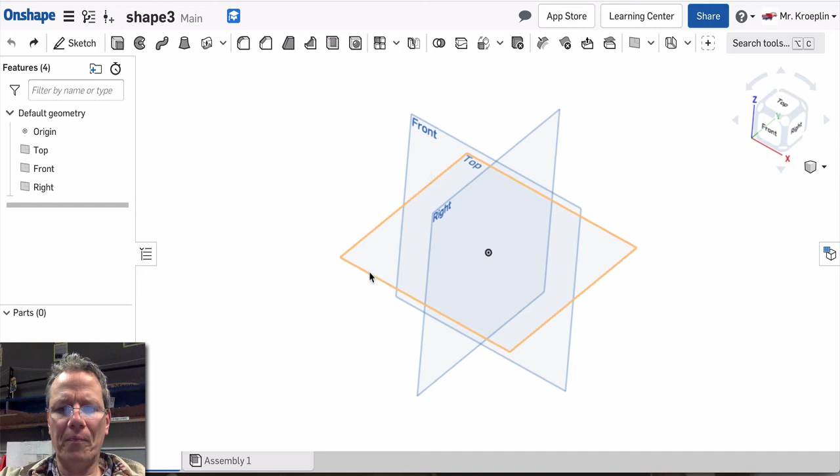So 2.75 and 1.5, let's go. Top view, right click, new sketch, and hit N. Our dimensions again: 2.75 and 1.5.

Next, let's make this. The radius of this is 0.75. Remember, the radius is from the center to the outside, and twice the radius is the diameter. Now this diameter is just this little circle, we're going to do this part here.

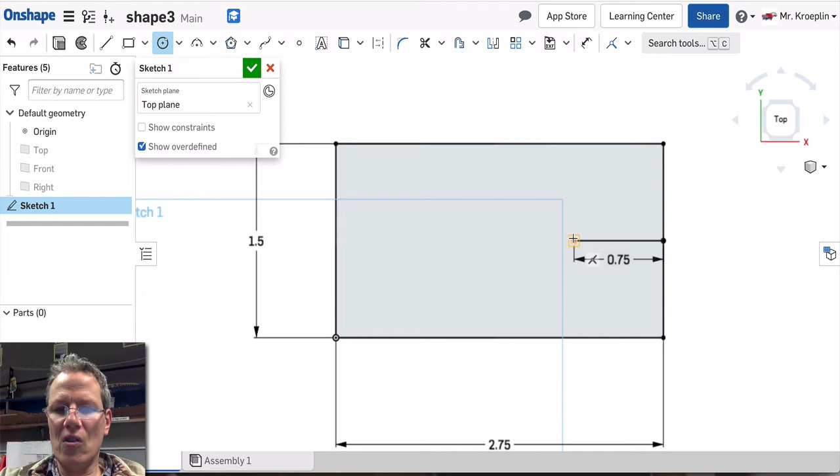So radius 0.75. I'm going to make a line from the center, 0.75, enter, escape. Now my circle, I'm just going to go out to here and touch that edge, just like that. I'm going to take the trim tool and trim that away.

Now let's make this circle here. It's 0.5 inch diameter. 0.5, and now we're okay.

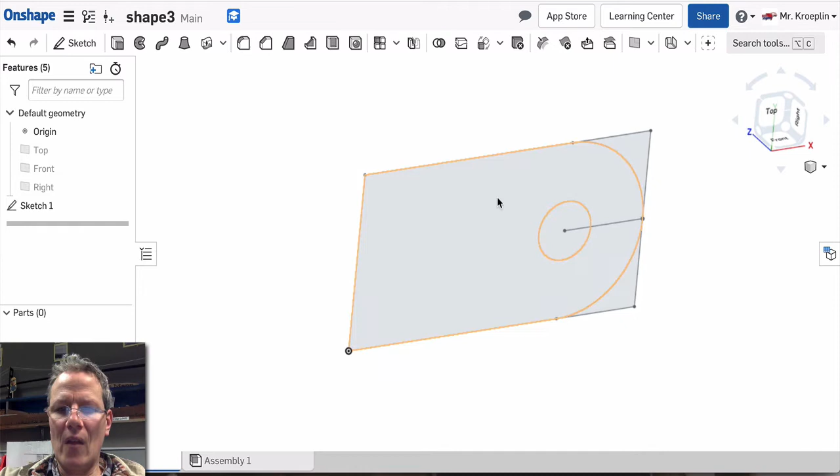Now I'm going to select this and extrude it out the thickness of this here. That thickness is right here, 0.5 inches. See that? 0.5 inches. 0.5, enter.

Alright, now let's build this small piece on the bottom. That piece measures 0.5 inches by how tall? Well, we know this is 1 inch, and this is 0.5, so that would mean this would be 0.5 by doing a little subtraction.

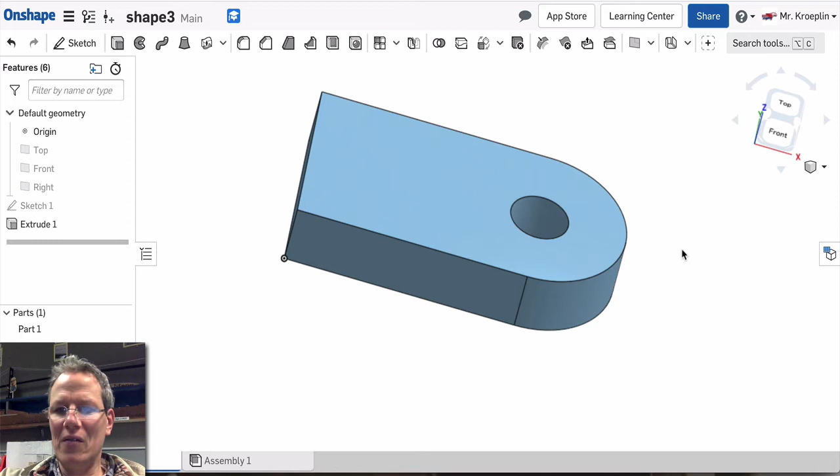So I'm going to make sure I'm on the bottom. Here's the top, flip that over to the bottom. Select, right click, new sketch, and hit N. We can use the rectangle. 0.5, enter, it's already the correct length.

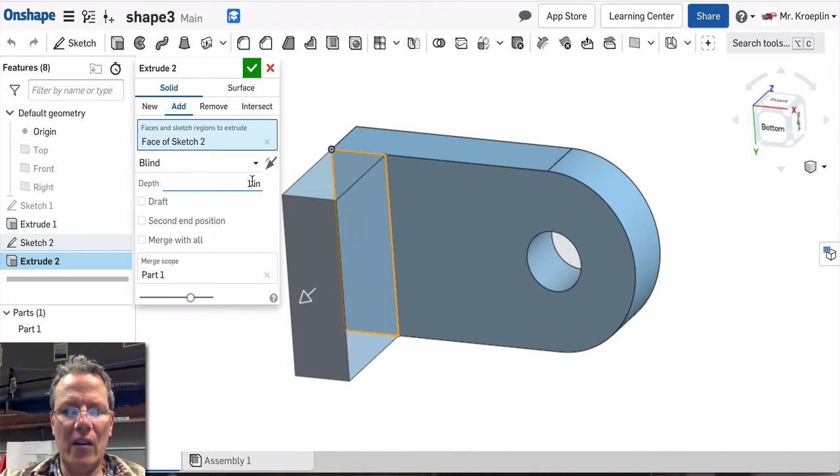Now I'm going to select this, extrude it, and that also is 0.5. Okay, now we have the bottom part done.

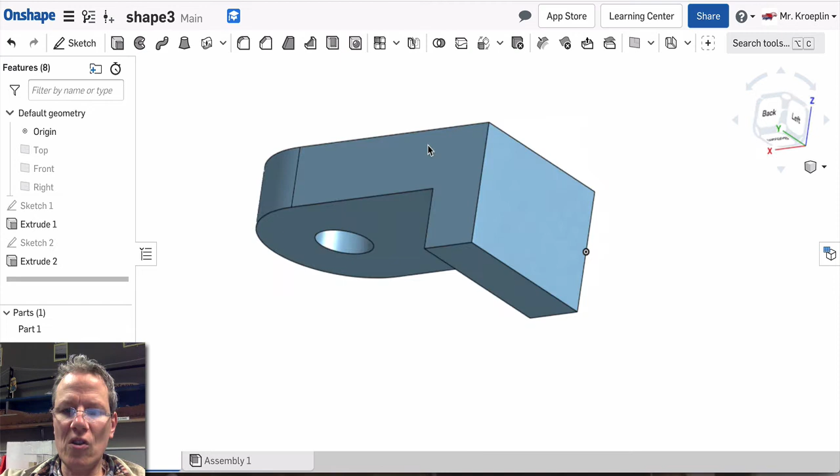Let's do the top. This gets a little tricky, I tried it a few different ways. The best way I found is to go on the back side here and create a sketch. I'm going to turn this around, select, right click, new sketch, and flatten this out.

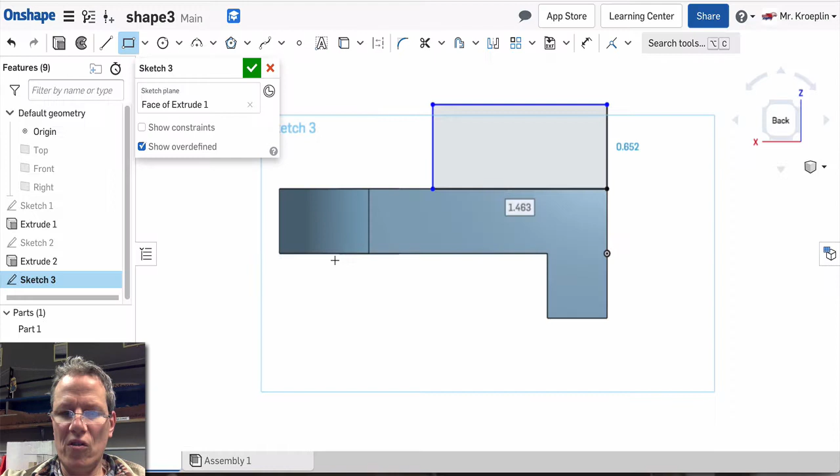Now the width of this is 1.25 inches. The height of that part is 1.75 minus 1, which is 0.75. So 1.25 by 0.75. I'm going to take a rectangle and go out this way. Again, it's 1.25 by 0.75.

So what this does is give us the overall shape. Now, we know that the radius here is 0.64. Here's the center line of this arc, or this circle. If you spun this all the way around, this would be the center. So 0.64 inches down from here.

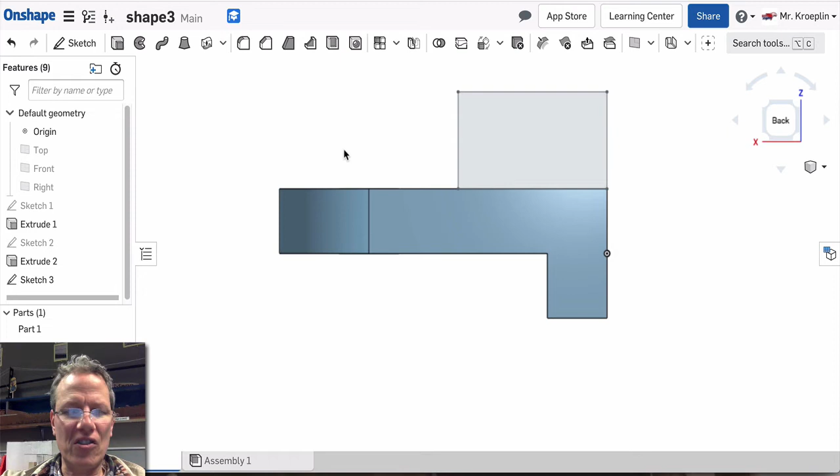Let's make a line. Oops, I accidentally got out of my sketch. That's okay, just double click here. There's my sketch again. This line is from the center, and again it's 0.64. 0.64, enter.

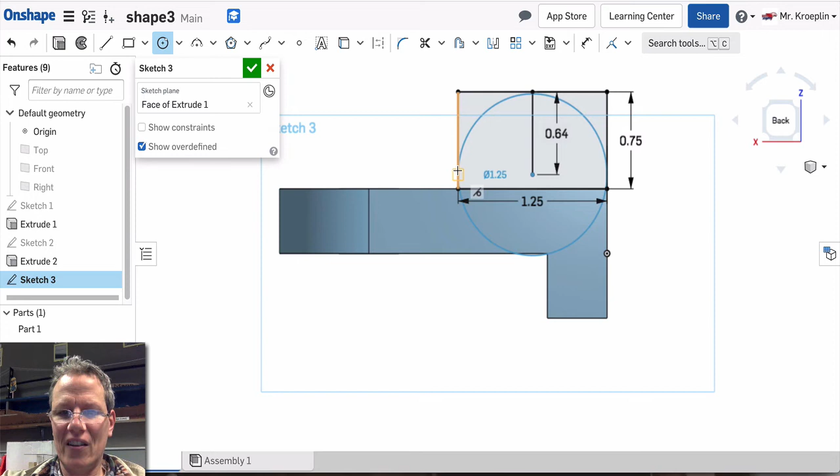Now from here, this center line, I'm going to create this 0.64 radius. 0.625 times 2 is 1.25, that's the diameter. So circle, to here, I'm just going to touch that. You see how it automatically goes to 1.25? Click there. Now I just need to trim away a little bit of stuff right there.

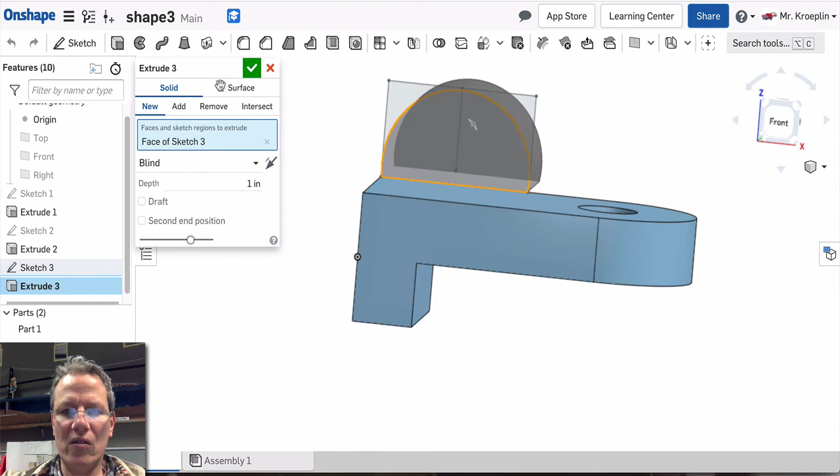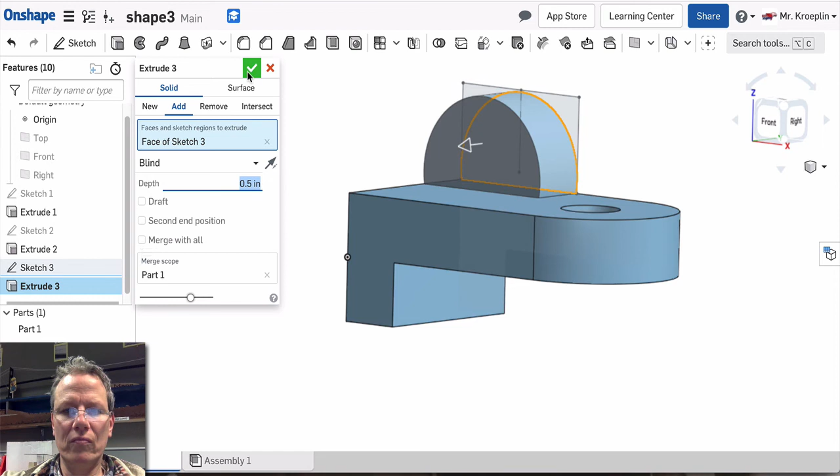Just like that. All right, now something doesn't look right. Let's take a look here. You see that little edge there, and how it's kind of going inward here? It has something to do with my sketch.

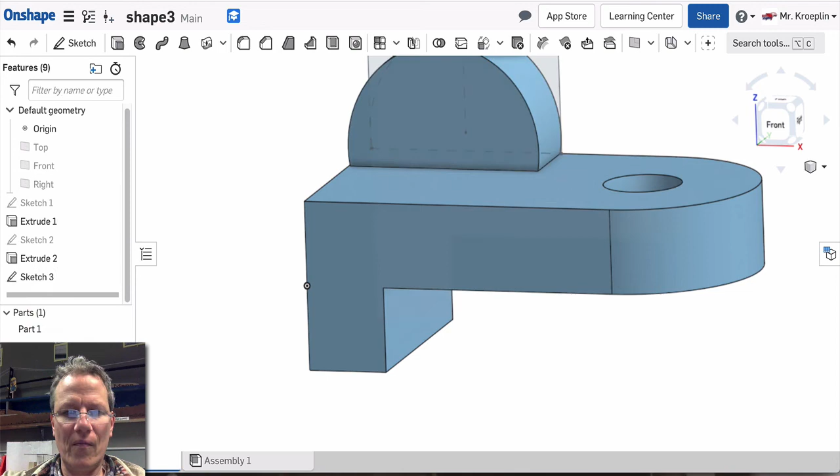So what I'm going to do is delete this extrusion. I'm going to double click on this sketch and look really close in these areas here. Oh, there it is, I need to do a little more trimming. So I'm going to trim that little piece there.

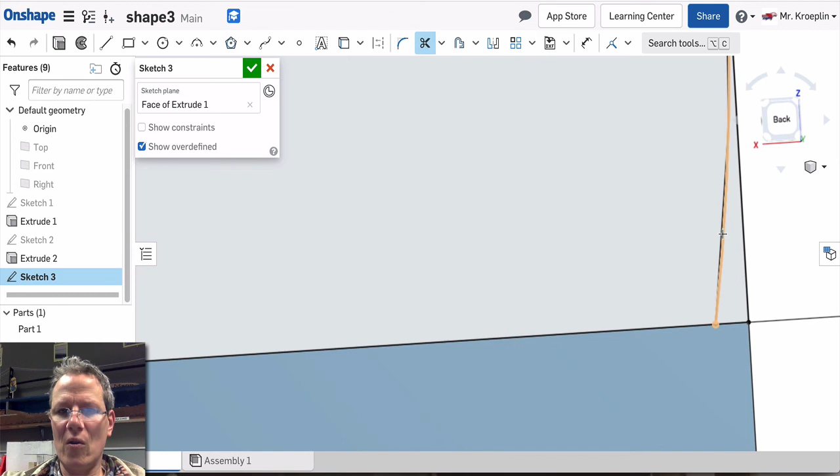On the other side, I'm going to zoom in a little closer so you can see. We extruded this area here, but we want this, so I'm going to trim this away as well. Just like that. That looks good, alright, now accept that.

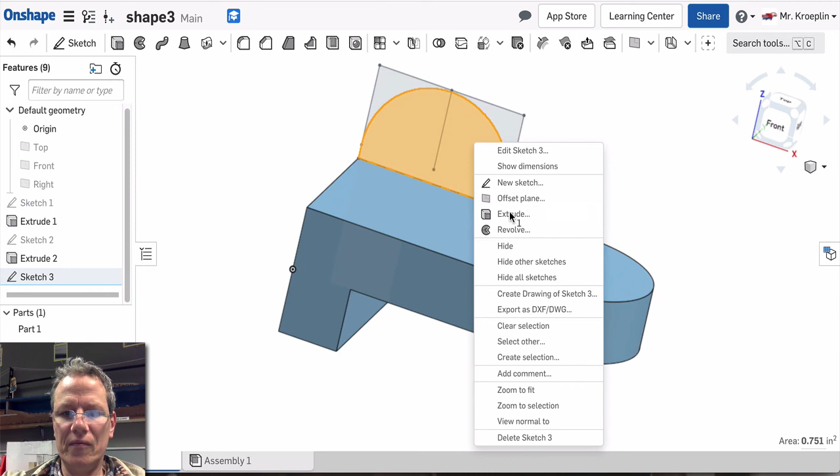I'm going to go back again, select this here, extrude, opposite direction, 0.5. And there we go. Now you can see how this lines up really nice along in here.

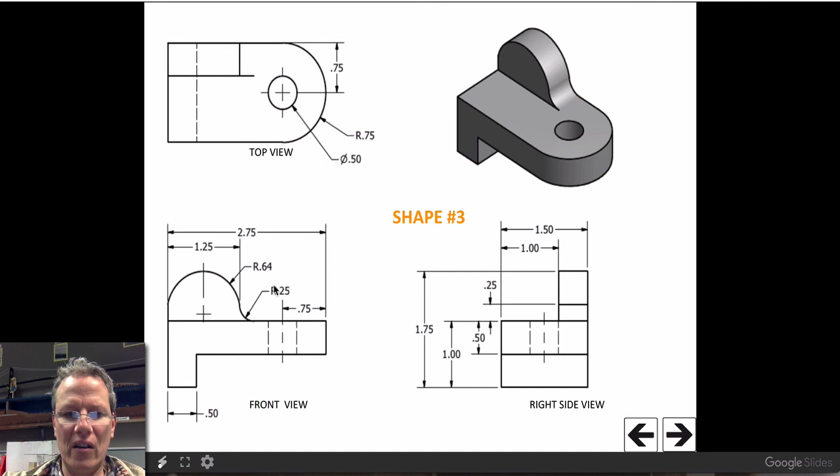All right, lastly, we need to put this fillet, it's called. Let me show you how to do that. The radius is 0.25, so all I do is select this here, let me zoom in, and then choose the fillet command. Change that to 0.25, enter. And there we go, our part is complete.